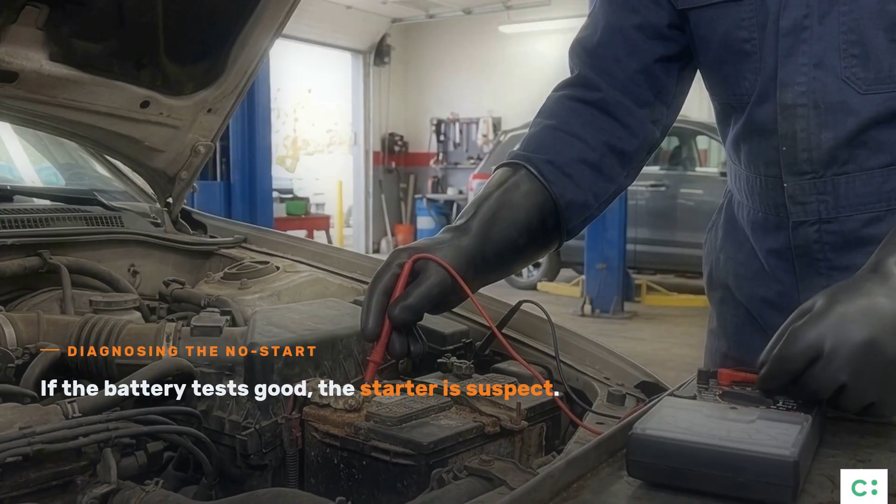Yes, if your car makes a slow rrr sound, or one hard click on a very cold morning while the dash stays bright and the battery tests good, the starter is the main suspect. The way to prove it is to watch battery voltage during the crank try. Then, check the heavy starter cables and the main engine ground strap before you buy parts.

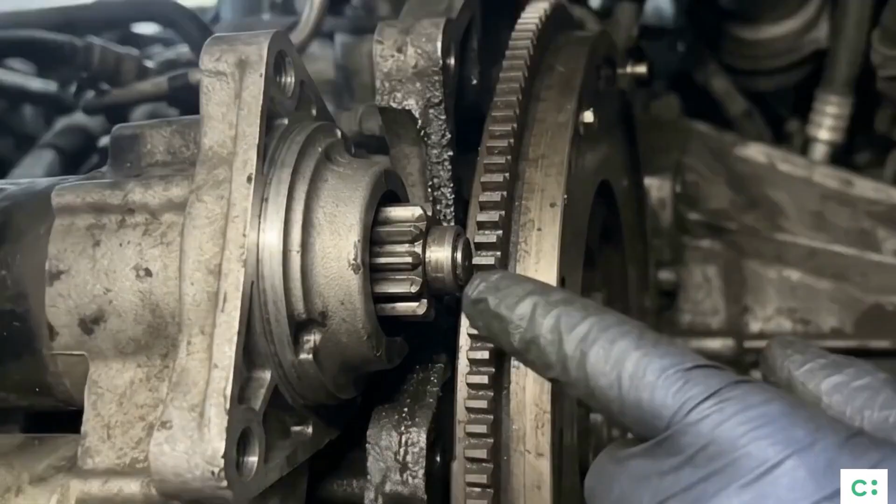Here is the plain reason. In deep cold, the grease inside the starter can get thick like glue. That drag can slow the motor down or keep the drive from pushing the pinion gear out far enough to meet the flywheel. At the same time, worn carbon brushes inside the starter can shrink in the cold and pull away from the copper commutator.

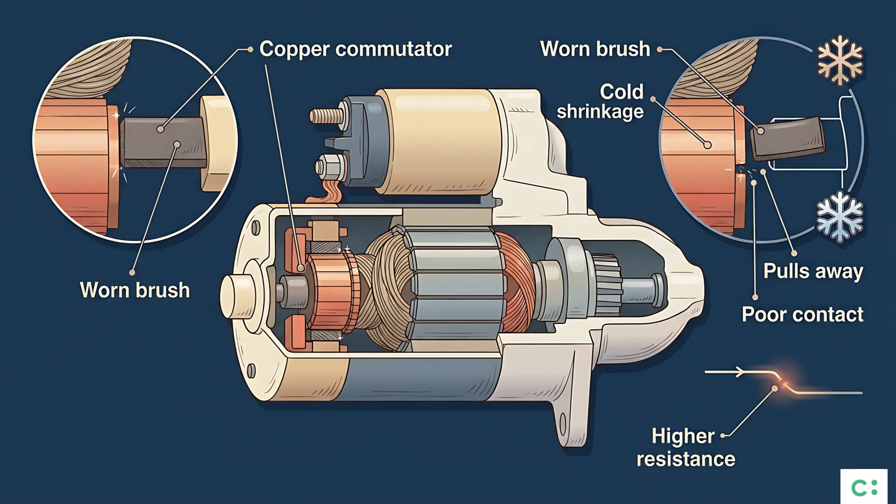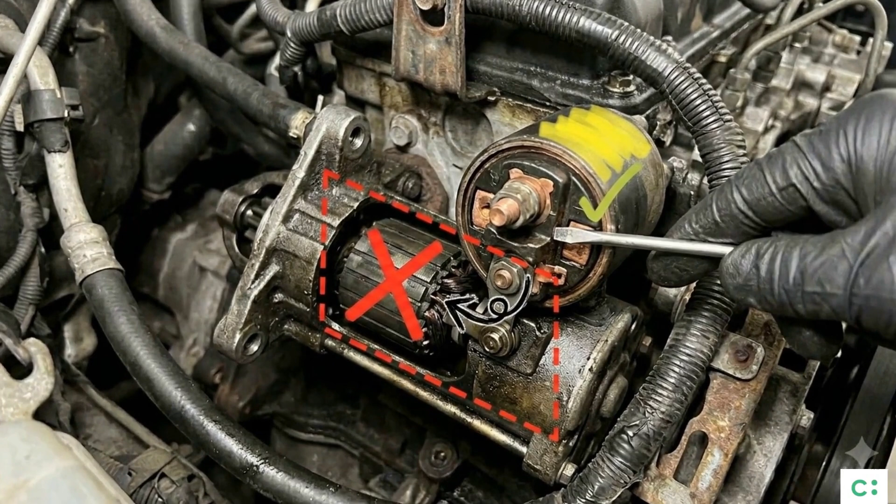That raises resistance or opens the circuit, so the starter cannot pass the more than 150 amps it needs to spin. The solenoid can still move and give you one loud click, but the motor may still fail to turn the armature. That is why the sound matters. One hard click means the solenoid moved. It does not mean the starter motor itself is healthy.

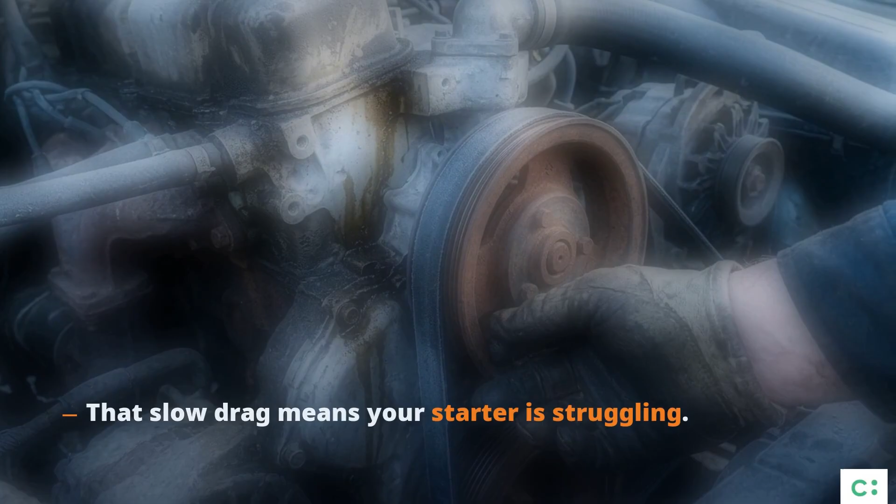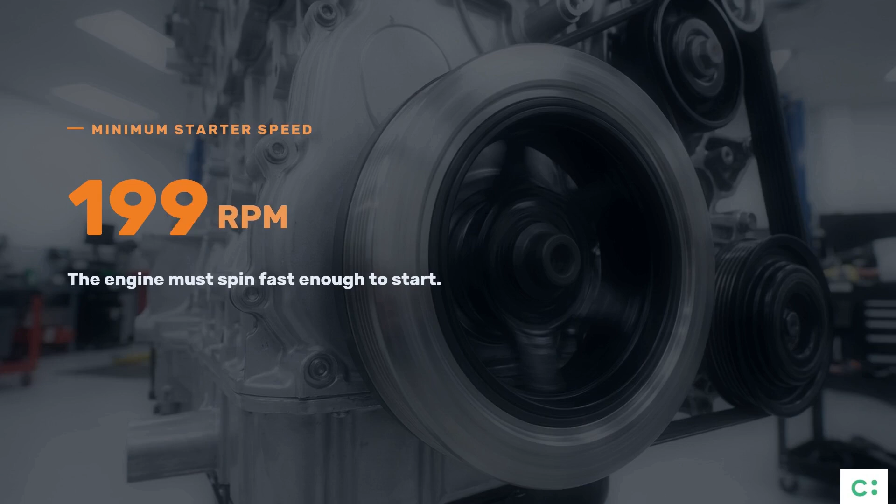A slow rrr means the starter is trying to turn the engine, but it is dragging and not doing it fast enough. A good starter needs to spin the engine at about 200 or more revolutions per minute for a normal cold start. If the grease is thick, the drive is stiff, or the brushes are losing contact, it may not get there.

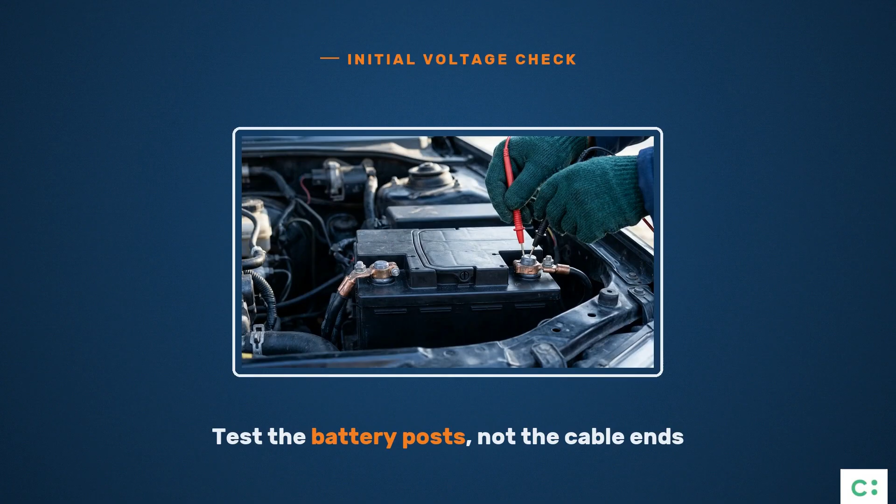Start with the battery voltage drop test. Put the meter on the battery posts, not the cable ends. That part matters because you want the true battery reading, not a reading through a bad connection. Then, have a helper turn the key to start while the problem is happening, best on the cold morning when the fault shows up. Watch the voltage while the starter is asked to work.

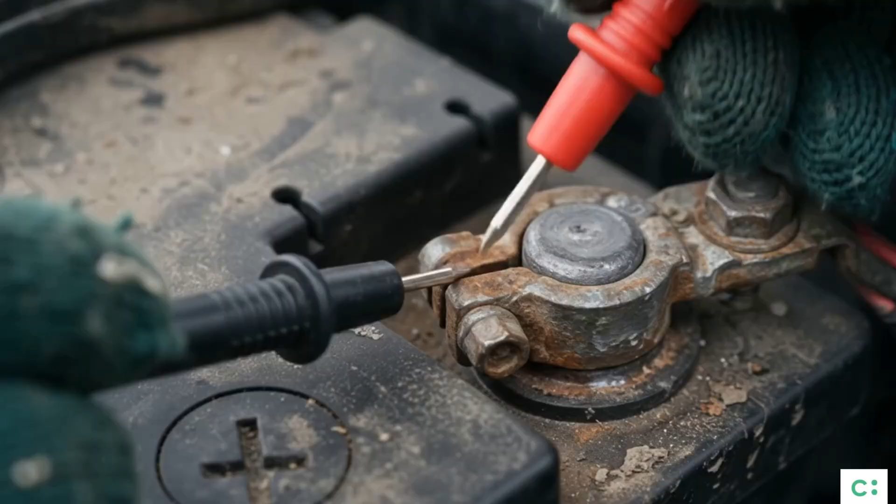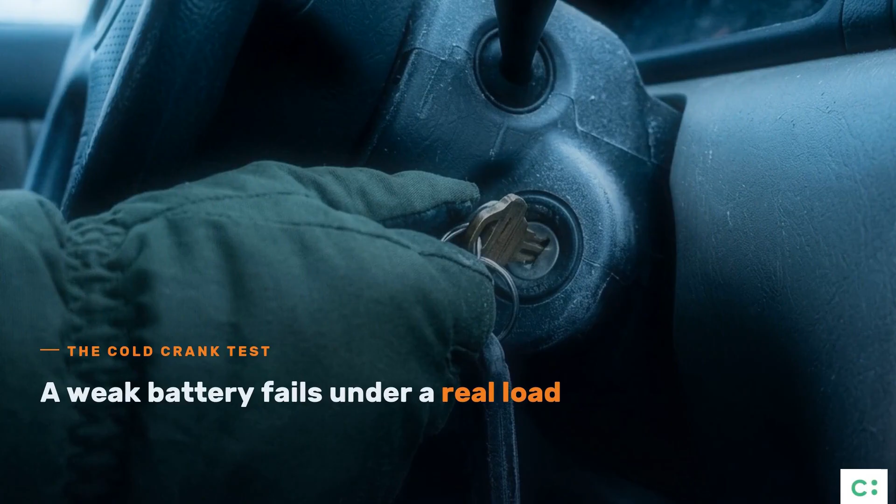If that voltage falls hard, below about 9.5 volts, the battery does not have enough cold cranking output at that moment. It may have looked fine at rest. It may even have passed a simple parts store test. But under a real cold crank load, it is weak. In that case, the battery is still part of the problem.

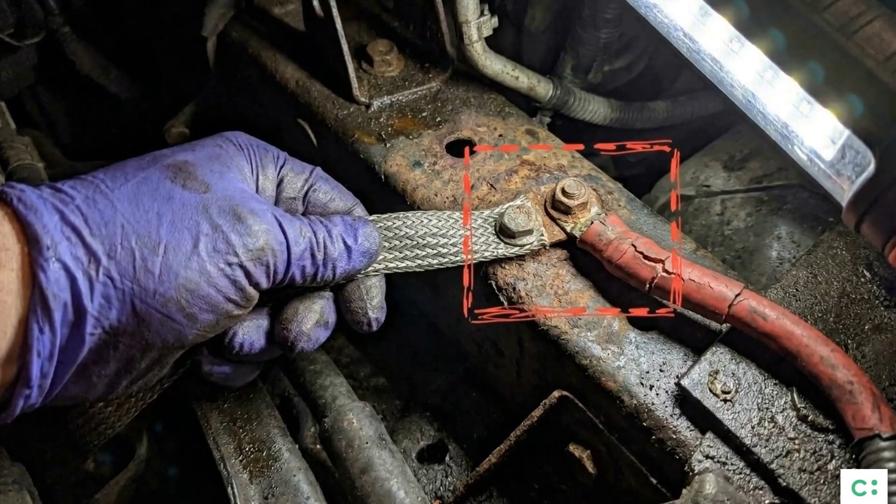If the voltage stays strong, around 11.5 volts, but the starter barely turns the engine or only clicks once, the battery is not the main choke point. That result points you toward the starter itself, or toward too much resistance in the heavy current path. Most often, that means the main positive cable to the starter, or the main engine ground strap.

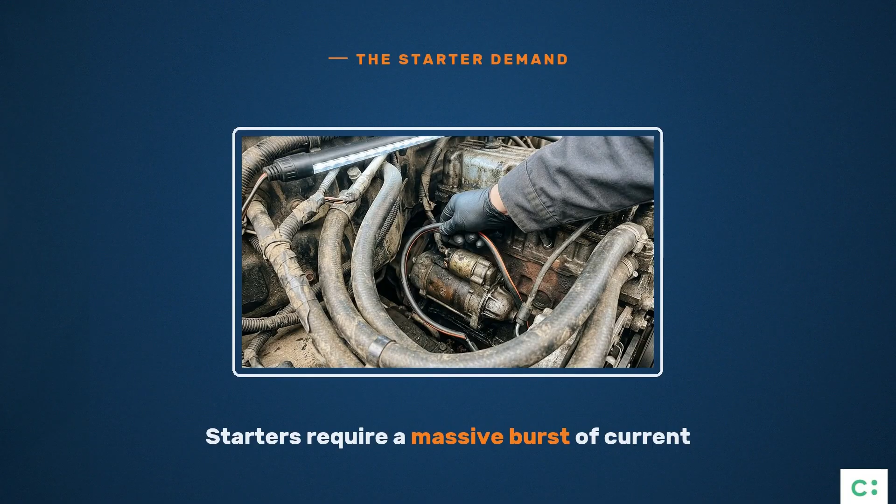That split is the key. Bright dash lights do not clear the starter circuit. The lights use a small load. The starter needs a very large burst of current for a short time. A cable can still run the dash and fail when the starter asks for real current. The same thing is true for a weak engine ground strap. You can have bright lights, one solid click, and still have a bad high current path.

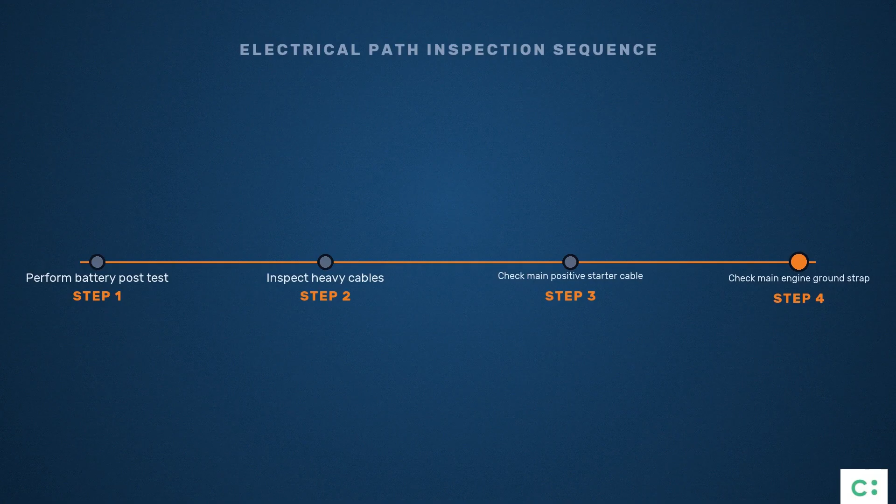So, after the battery post test, go look at the heavy cables. Check the main positive cable that feeds the starter. Check the main engine ground strap from engine to body or battery ground. Use your eyes and your hands. Look for green or white corrosion at the ends.

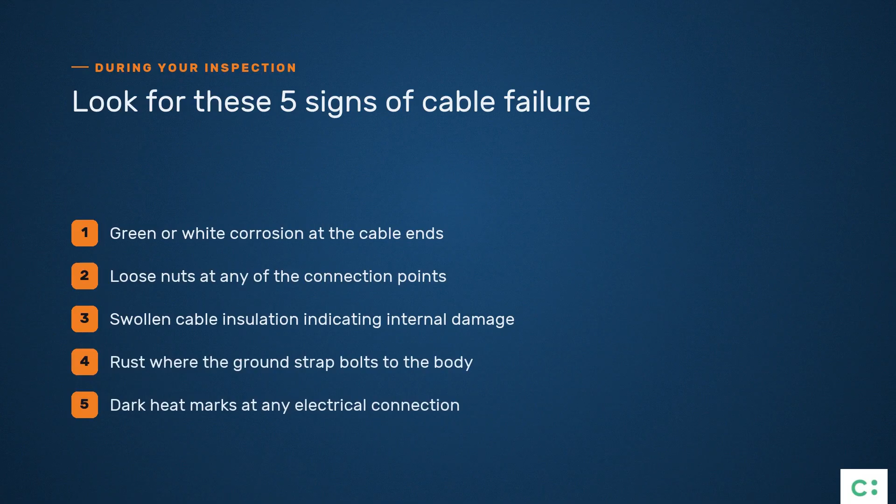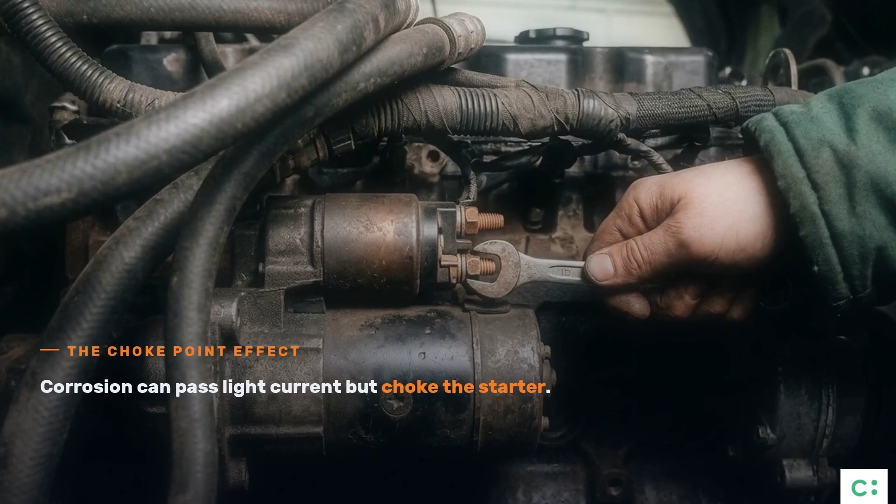Look for loose nuts, swollen cable insulation, rust where the ground strap bolts down, and dark heat marks at any connection. In deep cold, hidden corrosion inside a crimp or under the insulation can act like a choke point. It may pass enough current for lights and modules, but not enough for the starter.

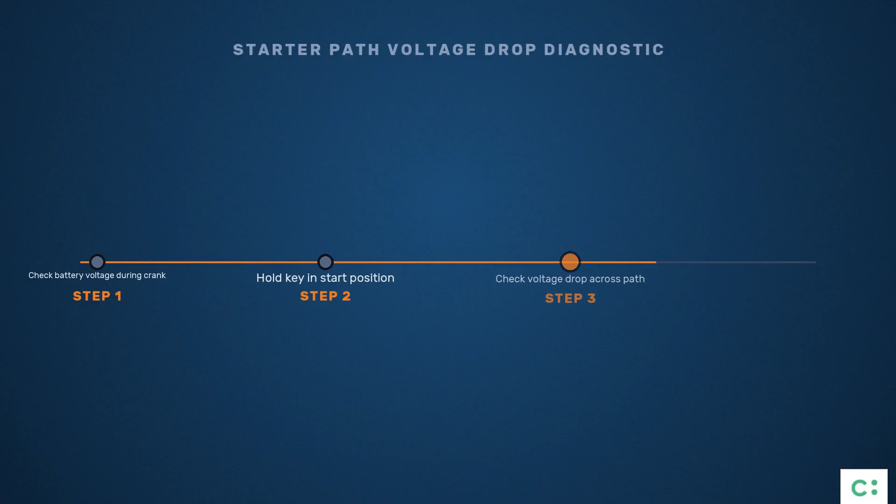If the battery voltage stayed strong during the crank try, the next step is another voltage drop check, this time across the heavy starter path while someone holds the key in start. Now, you are not just asking if the battery is good. You are asking where voltage is being lost under load.

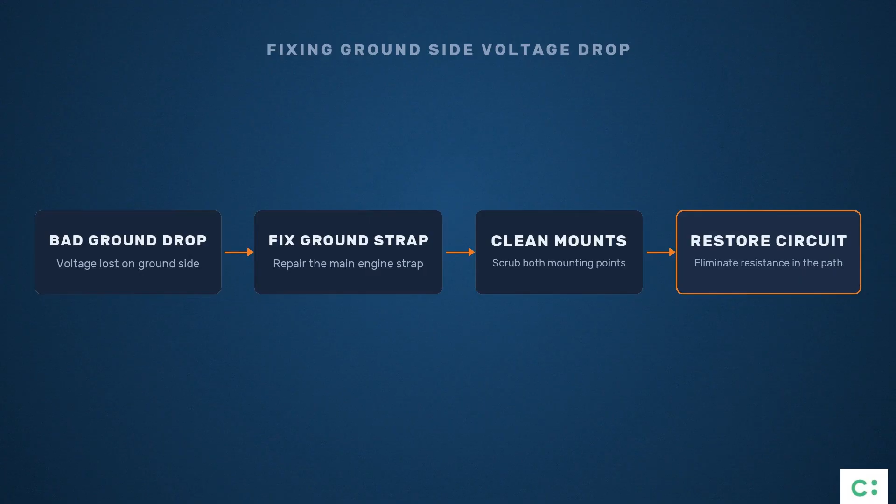If the bad drop is on the ground side, fix the main engine ground strap and clean both mounting points first. If the bad drop is on the positive side, repair the cable or its connections first. If both sides are sound and the battery holds up, then the starter itself moves to the top of the list.

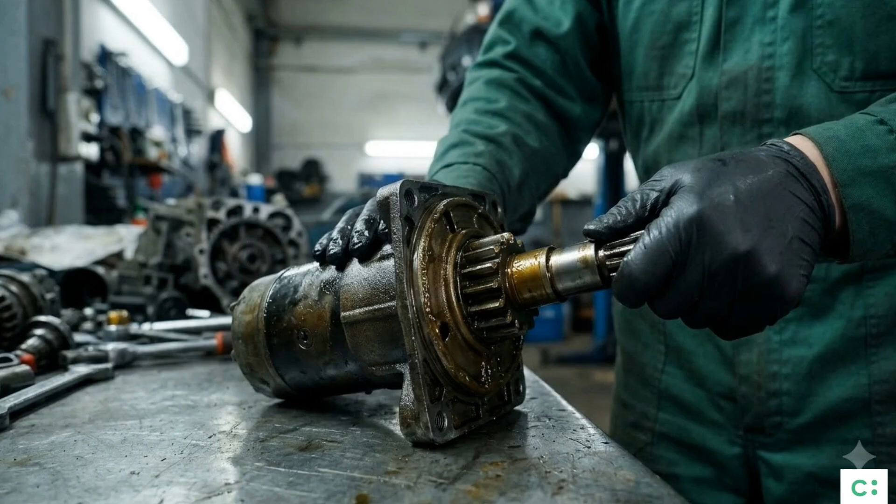Now tie that back to the sound you hear. A slow rrr on sub-freezing mornings means the starter motor is turning, but dragging. That can happen when grease in the reduction gears gets thick, when the Bendix pinion shaft gets sticky, when worn brushes lose clean contact, or when the ground path cannot carry full current.

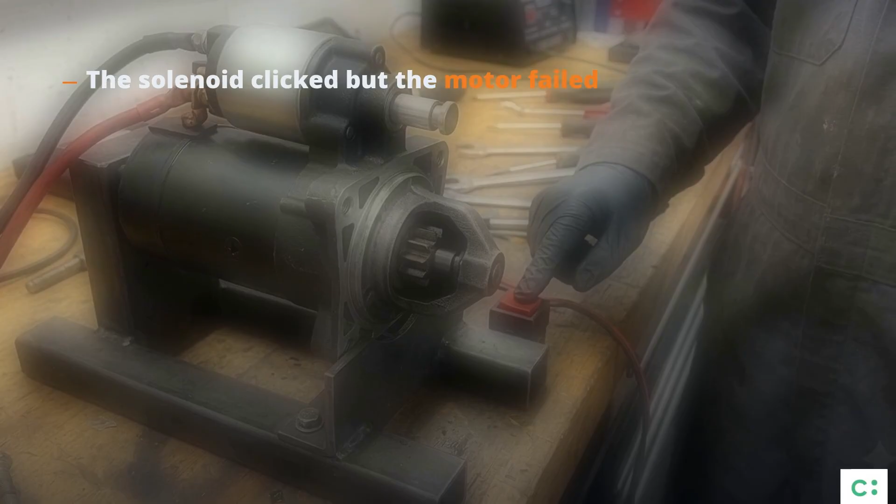A single loud click means the solenoid moved, but the motor did not spin the armature the way it should. That can happen when the brushes are too worn to make contact in the cold, when the grease drag is too high, or when the cable path has too much resistance.

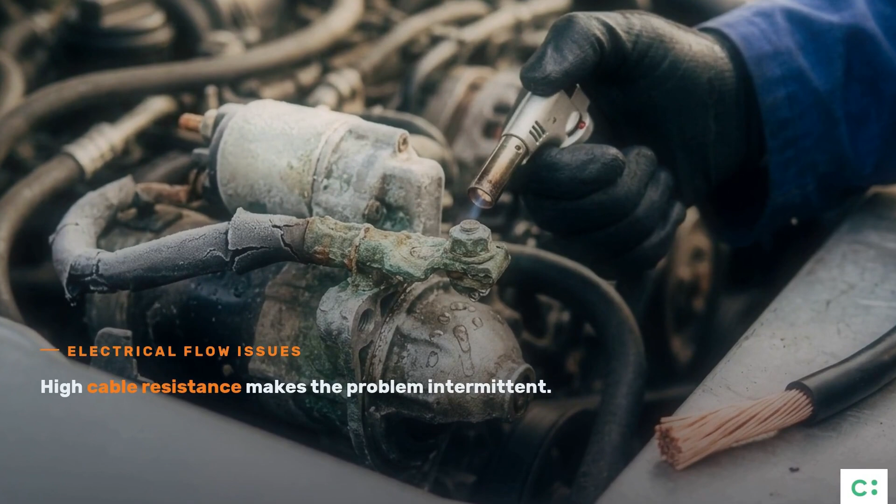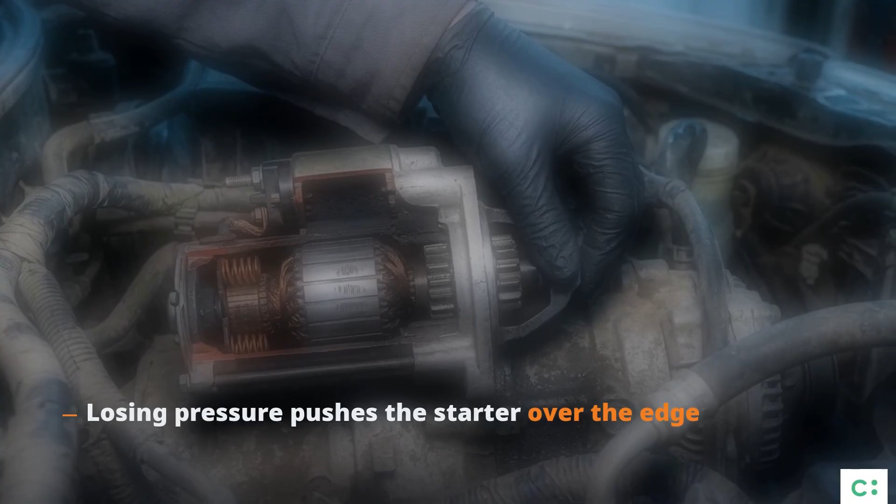This is also why the problem can come and go with temperature. In milder weather, a weak starter can still get by. Then the air turns colder, the grease gets thicker, the moving parts get less free, and the brushes lose just enough contact pressure to push the starter over the edge. So the same car may start every day when it is warmer, then fail first thing in the morning once the temperature drops below freezing.

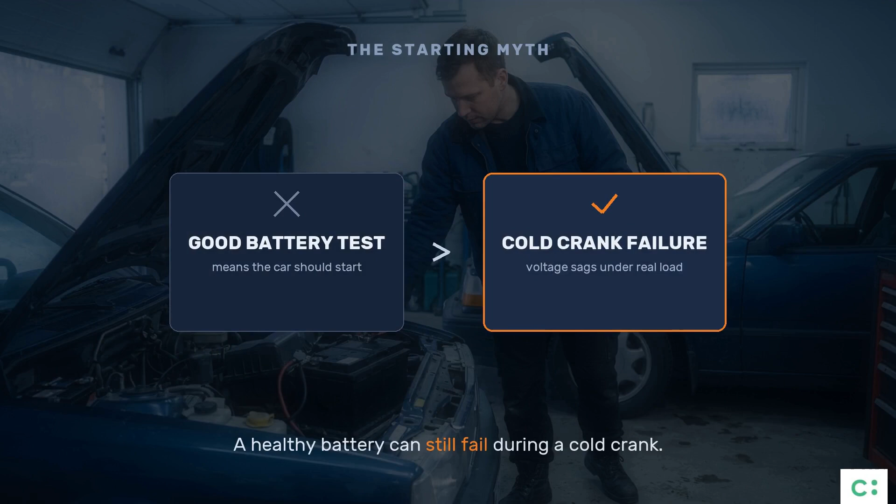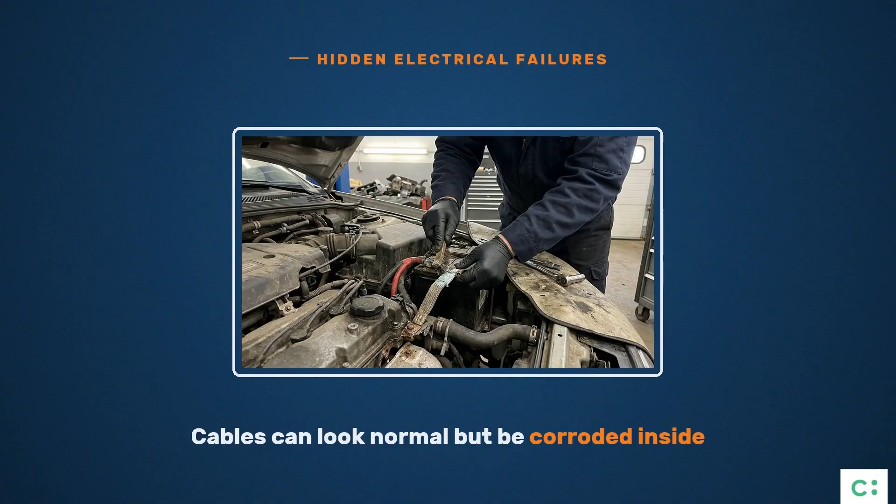A lot of drivers get thrown off here because the battery tested good before. That does not always settle it. A battery can test healthy at rest and still sag too far only during a real cold crank. A cable can look normal on the outside and still be corroded inside. And a bad main engine ground strap can act almost exactly like a bad starter. That is why the voltage drop test during the actual fault is the field test that matters most.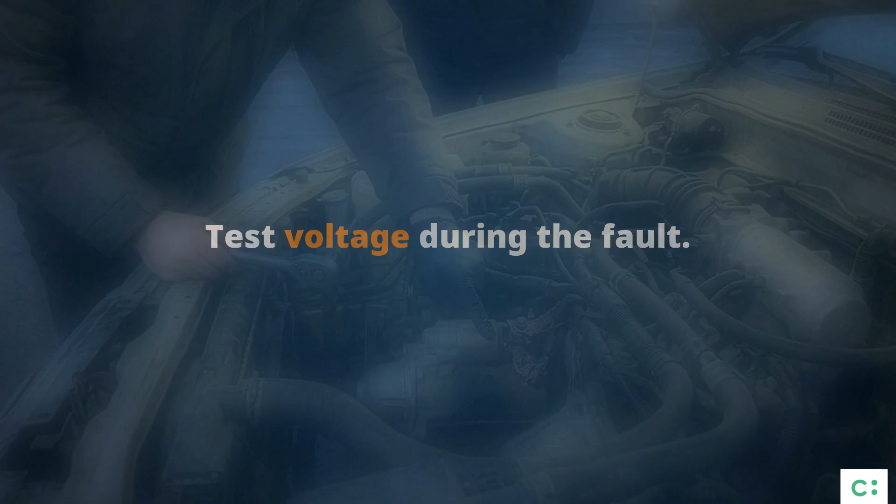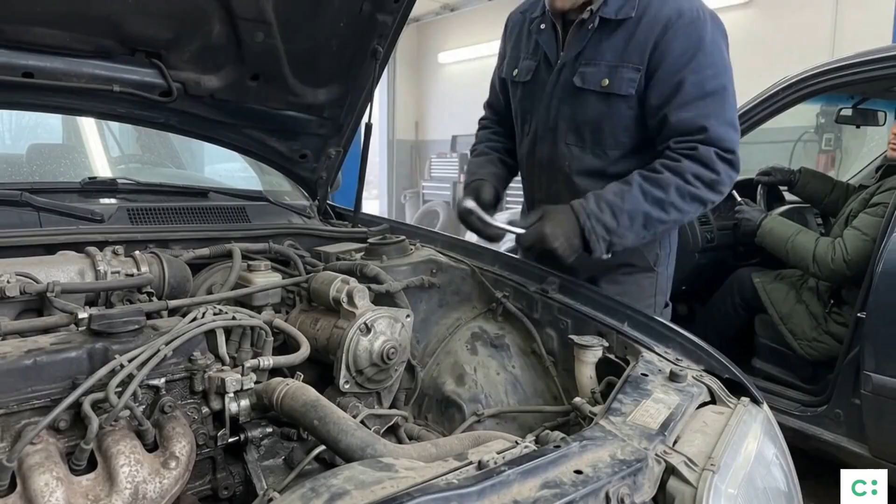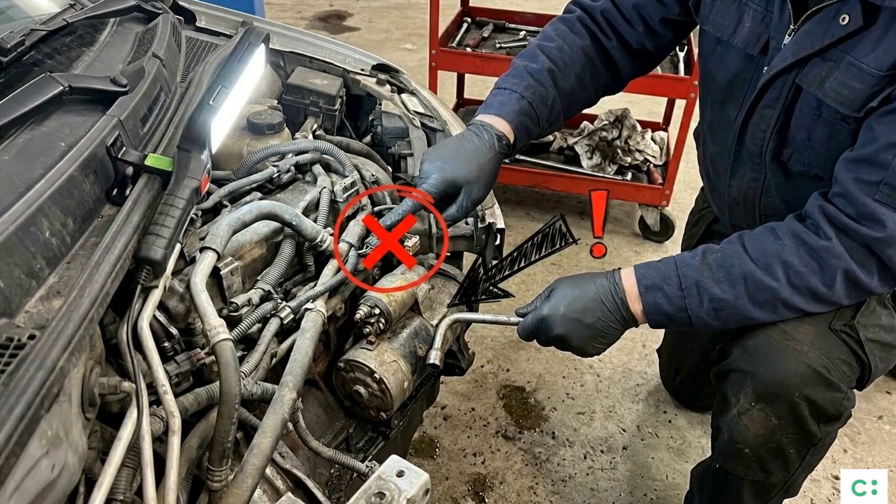There is one short-term trick if you are stranded and need one more start. It is the percussion test. Have a helper hold the key in the start position. Then tap the round starter motor housing firmly with a hammer or a tire iron. Do not hit the solenoid plug or the wiring. Hit the motor body with a firm tap, not a wild swing.

That shock can jar worn carbon brushes back into contact with the commutator. It can also break loose grease that has gone stiff in the cold. If the engine then cranks, that is strong proof that the starter has failed inside. But treat that tap only as a clue and a way to get moving once. It is not a repair.

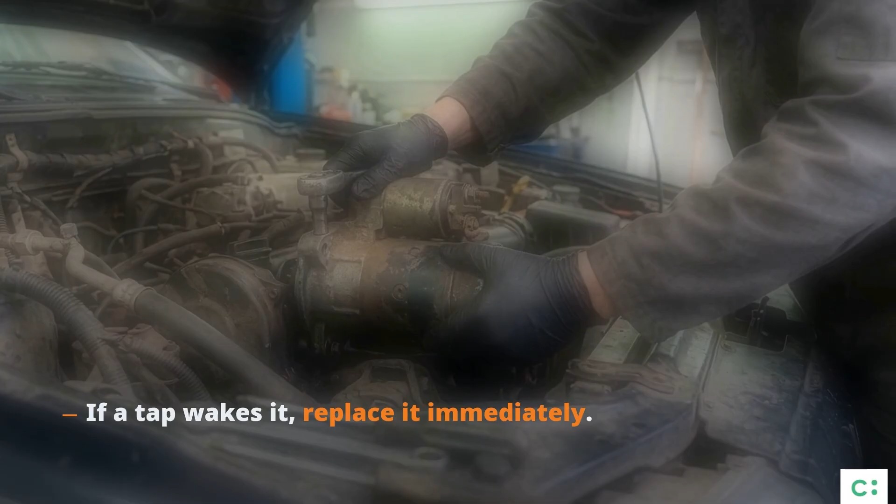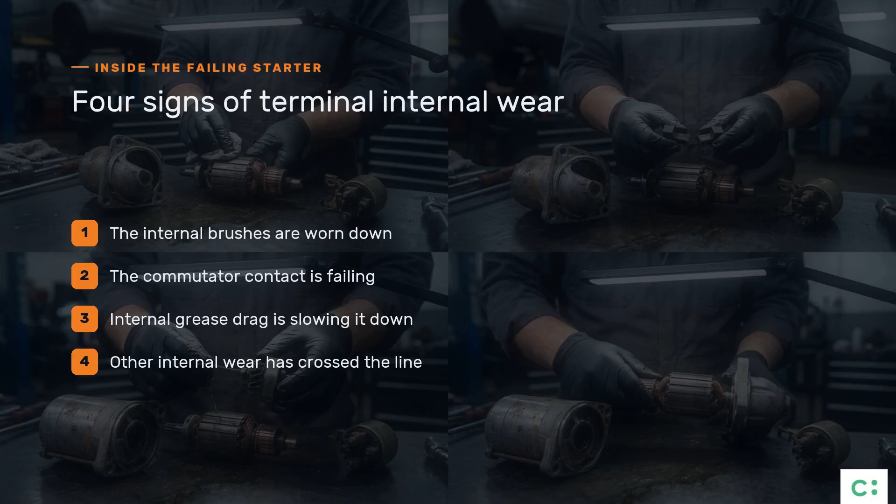If the starter wakes up after a tap, the starter is terminally compromised and needs to be replaced right away. The brushes, the commutator contact, the grease drag, or other internal wear have already crossed the line. You may get one more start today, then nothing on the next freeze.

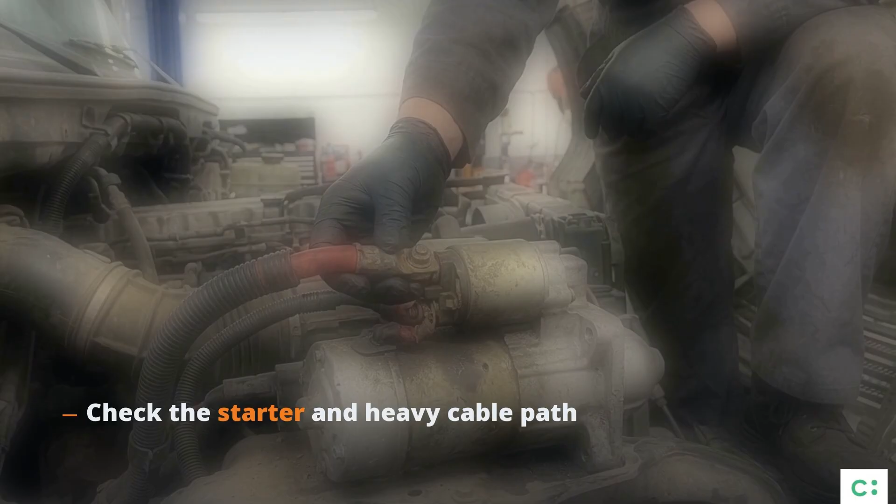So, keep the path simple. Check battery voltage at the posts during the crank try. If it falls below about 9.5 volts, the battery lacks cold cranking output under load. If it stays around 11.5 volts and the engine barely turns or only clicks, shift your focus to the starter and the heavy cable path. Then inspect and test the main positive cable and the main engine ground strap under load. If the cable path is sound, the starter is your bottleneck.

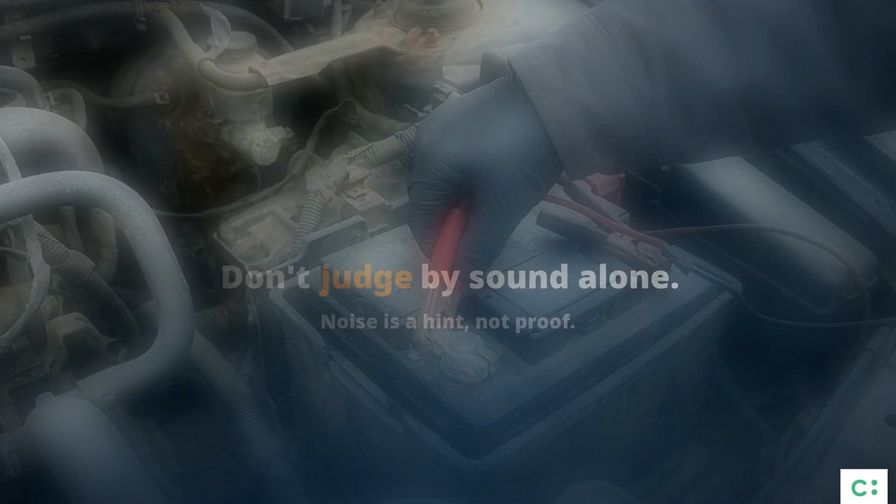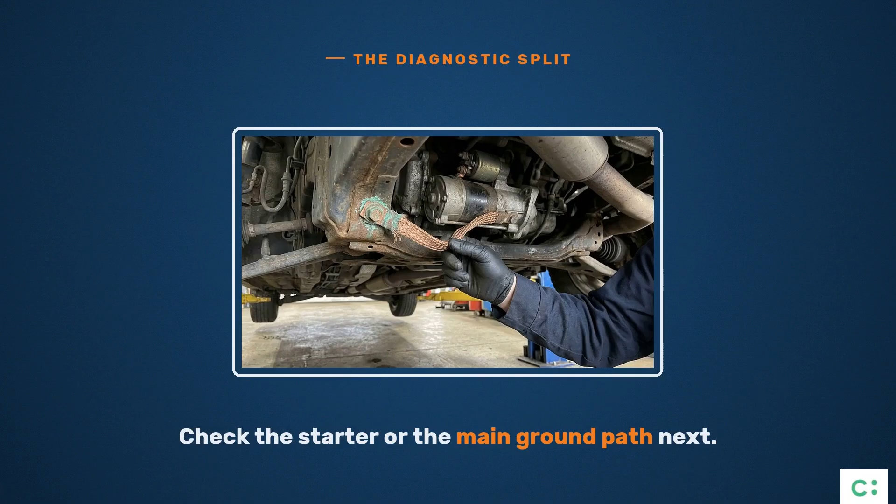Do not try to call it from sound alone. The sound points you in the right direction, but it is not the full proof by itself. Slow drag means the starter is turning too slowly. One hard click means the solenoid moved, but the motor did not do its job. In both cases, if battery voltage stays strong, the starter or the main ground path is where you look next. That is the clean split.

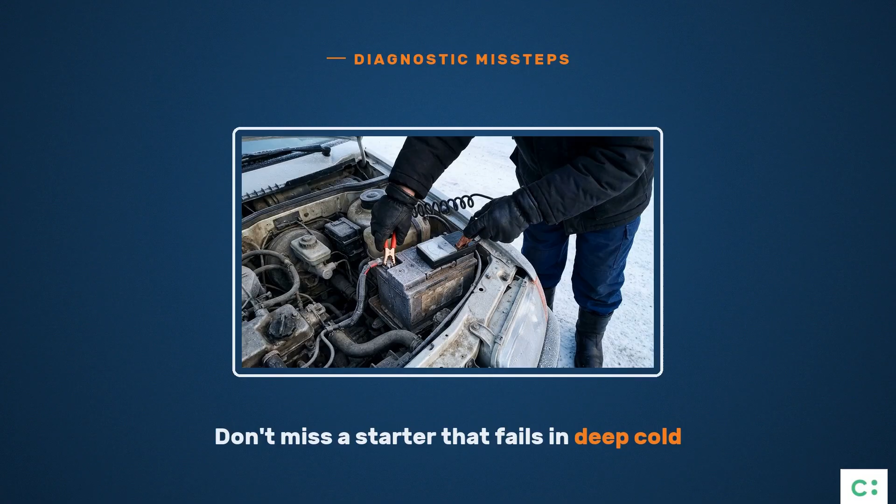This matters because guessing gets expensive and wastes time. If you put in a starter when the real fault is a corroded ground strap, you did extra work for nothing. If you blame the battery because the lights stayed bright, you can miss a starter that only fails in deep cold. A real load check at the battery, then a voltage drop check on the heavy path, keeps the repair honest.

So the direct answer is yes. A bad starter is a common cause of a slow rrr, or one solid click on a sub-freezing morning when the dash stays bright and the battery tests healthy. Cold can make the starter grease turn thick, keep the Bendix drive from moving right, and make worn carbon brushes lose contact.

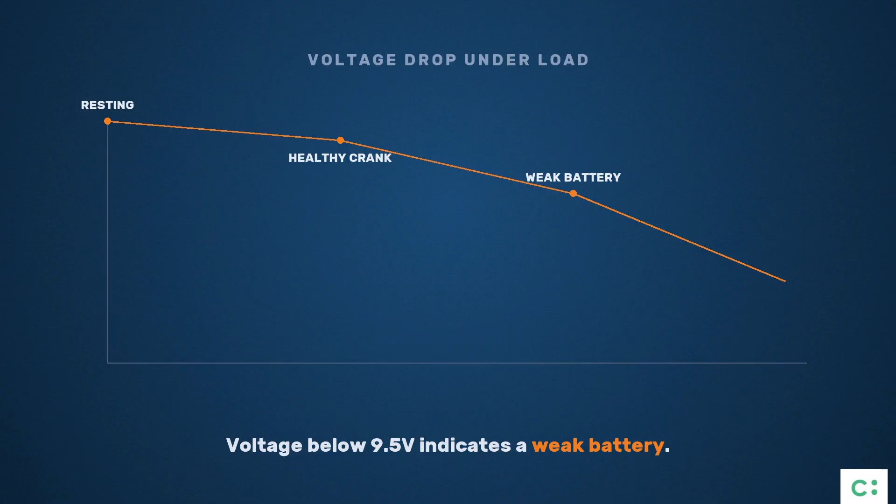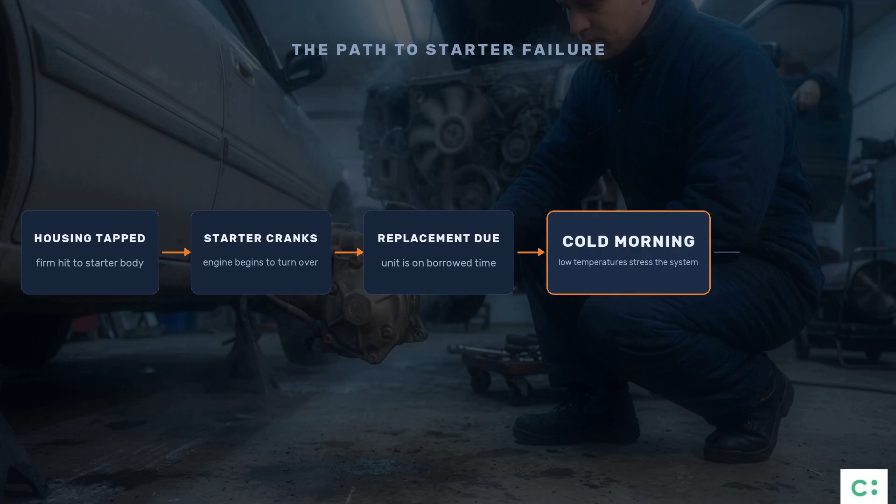The proof is simple. If battery voltage drops hard below about 9.5 volts during cranking, the battery is weak under load. If voltage stays strong around 11.5 volts, but the starter barely turns, the starter itself, or the main engine ground strap, is the bottleneck. And if a firm tap on the starter housing makes it crank, the starter is on borrowed time and needs to be replaced. If you ignore it, the next cold morning can turn this into a full no crank. Check voltage drop before you buy a starter.